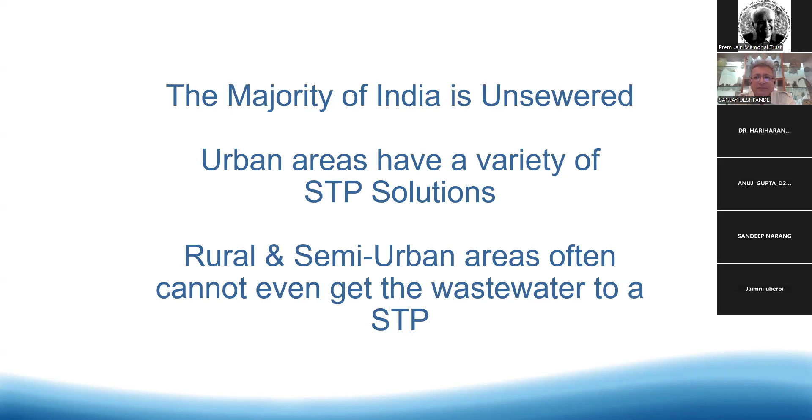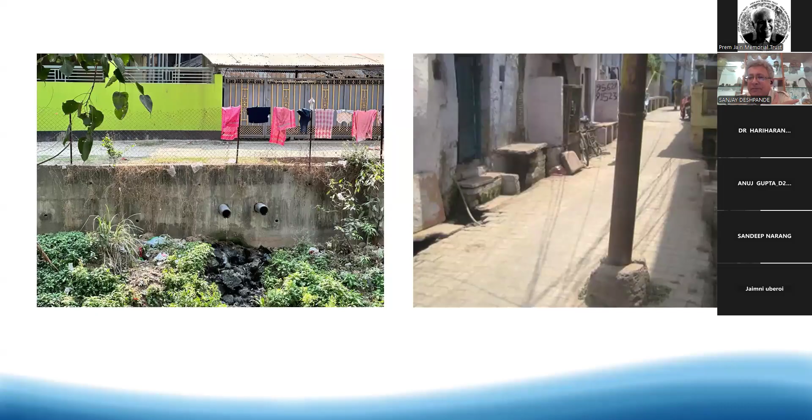Sometimes even from toilets. I've seen these repurposed and covered up to hide the fact that they're actually carrying shit from toilets along the road to the outskirts of a town. This is all over India.

The other problem you'll see that affects everything is layout. Our country is growing, it's gradually urbanizing - it doesn't mean everybody's moving to the cities, but people from villages are moving to small towns, small towns are moving to bigger towns, and so on and so forth. End result is they're all growing, and they're growing in an unplanned manner. Basically, wherever there is space, people build buildings. After that, roads come in. After that, water lines come in. After that, if it's possible, sewer lines come in.

End result is everything is basically designed to fail. And I'm going to take you through a series of examples to show you why this happens and what has happened.

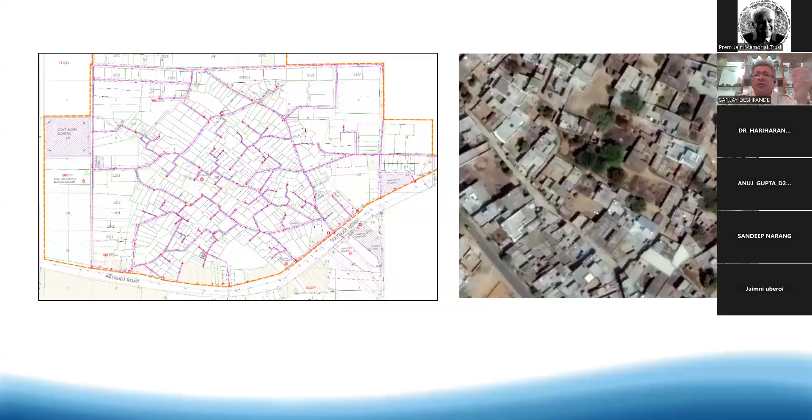Now, what are the challenges for rural or semi-urban sanitation? They're basically in three groups, and these are things each of you is going to face at one point or the other. One, these are the technical challenges. First of all, habitations have grown organically. Why does this matter? Well, sewer lines require lovely straight lines, as straight as possible. If you have roads that turn and weave, it's very difficult to put a sewer line. Every time you turn, the velocity of the sewage drops and you risk choking.

Another problem is narrow lanes. Why do I say digging can be a disaster? Well, it's very simple. If you look at the towns you live in, look at Delhi, for example - if you go around Delhi, you'll see most houses are ground plus 2, ground plus 3. When they were originally built, they were ground plus 1. When a little bit more money came, they added another floor, then another floor. And this is the typical pattern throughout India. So often buildings are not structurally sound, and if you start digging deep in narrow lanes, you risk building walls coming down. So people don't dig.

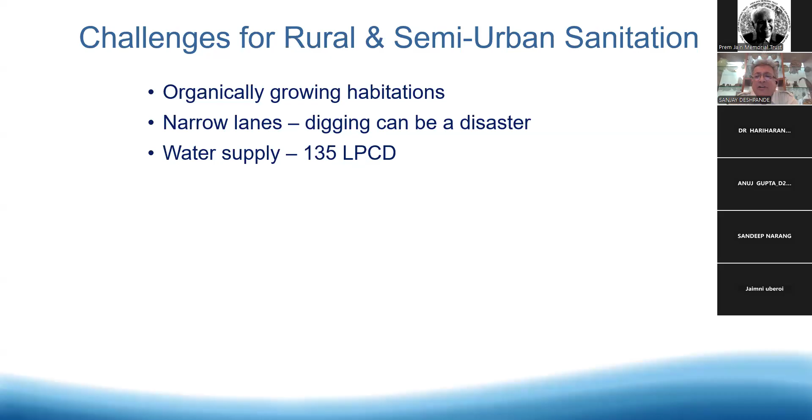The vast majority of rural and semi-urban areas, or even the outskirts of cities, get between 50 and 90 liters. Which means if you put in a sewer line, there's not going to be enough cleansing velocity, and all the solids will settle down and choke your pipe network. You will be doing a lot of work cleaning the pipes regularly, every few months. End result is putting in sewer lines becomes unviable.

People have come up with solutions. One, something you'll all run into: high-tech solutions. There's an attitude in India, especially as we're growing into a steadily wealthier country, that new is always better. The more bells and whistles you have, obviously the solution offered is better. Simple solutions don't work, green solutions are looked down on. Unfortunately, high-tech also means much higher operation and maintenance costs

and a much more likelihood of failure. When that sort of thing happens, people go to the second one: behavior change. It only failed because the public wasn't educated properly. We must teach people to behave properly so that the solution we gave them works. That attitude is probably the worst thing out there. Who are we to say that other people have to change their behavioral patterns so that a solution we imposed on them actually works? Should we not rather be designing a solution for them that works for them, that they can manage, that they can operate, that they can be proud of?

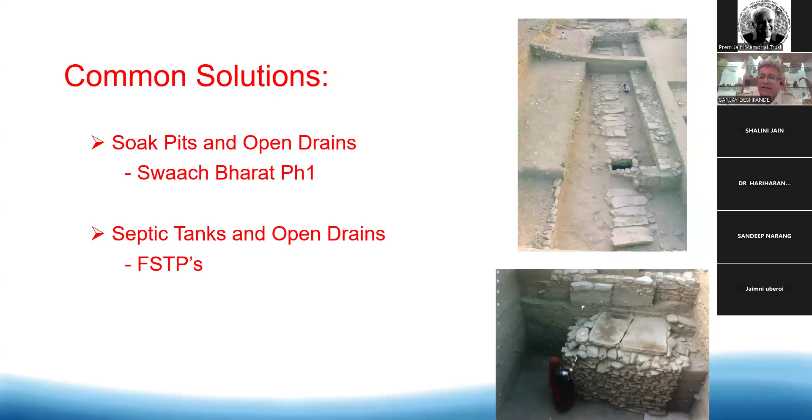So ask yourself, is there a better way? I'm going to show you a solution that we came up with. Like I said, this was designed for Canada. It's been made in India to work in India. So you can take it as it is. Hopefully some of you will agree with it.

Now, IL&FS was using this village to experiment on various sanitation technologies, using worms, using soak pits, using modified Deenbandhus. Various things were being tried out, and they were not happy with the results. And that's where they came in contact with us. And we said, we can sewer this village for you, treat all the water and recycle it for agriculture. This is something that they never thought was possible.

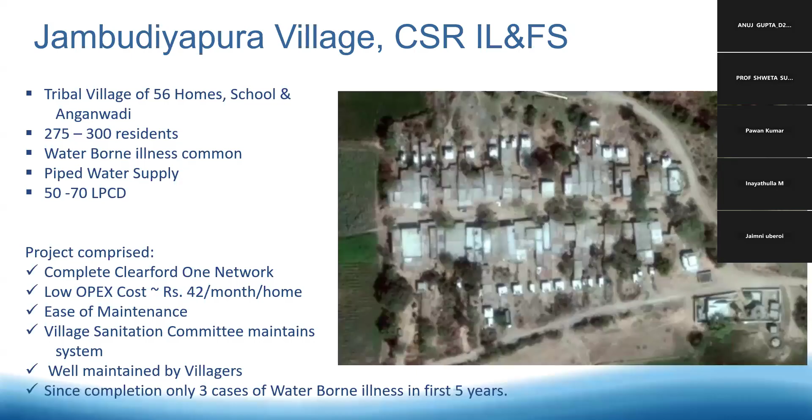Another project—this was paid for by L&T. This is a larger village, about 374 homes, 1,800 people. This is a village called Alwa, also very close to Vadodara. A similar kind of solution we put in there. Look at this—we are recycling for agricultural use approximately 36 million liters annually. What does that mean? That means if we had not put in this solution, 36 million liters of wastewater would have been going into the ground and into the village pond annually. That's what doing this stopped.

Think about the extra things, like extra agricultural income and all that. Just understand the impact you can have on the environment and on the lives of people. That's more than enough.

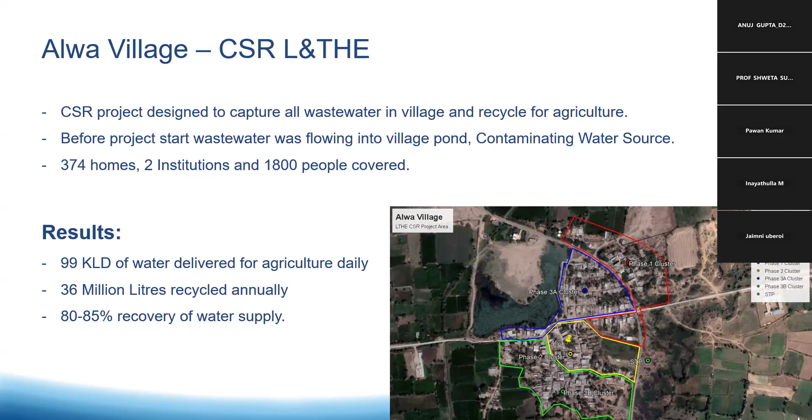Now I'm going to show you our technology. One note: it's completely green. Except for some minor electricity use, it's a completely green solution. The electricity, as I said, can be mitigated with solar panels. The solution is so green that we actually got the Solar Impulse Efficient Solution label from Switzerland for the work we've done in India. This was in 2020, at the height of COVID. We're very grateful to them for reviewing our technology and approving it at that time.

Now, the solution—this is why I say it's important to design for ground reality. What we do is we always design a solution that collects, transports, and treats all the generated gray and black waste: toilets, bathrooms, kitchens, laundry, everything. Only if you clean up everything do you stop those puddles of dirty water going down the side of the road. And only then do you reduce malaria, diarrhea, and so many other problems associated with stagnant water.

We designed a solution that's not dependent on water supply. We don't need 135, 150 liters. In India, we have installed systems as low as 35 to 40 liters and as much as 300 liters per person, the whole gamut and anywhere in between. It varies. You have to design a solution for the actual situation on the ground.

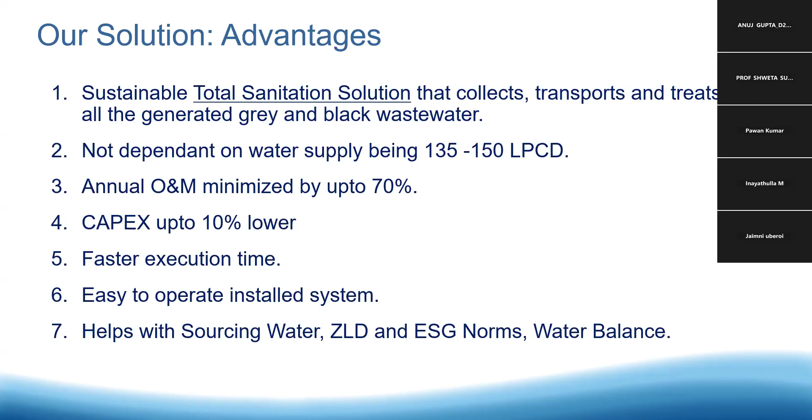More and more European companies, more and more North American companies, if they're going to be importing something from a company in India, they first ask for your ESG report, because it matters in Europe. It matters in North America. And if we are exporting to them, it's going to matter for us. So check those out.

Now, as to the technology. Remember what I said up front: there's not enough water to flush the sewer lines, to take everything to your treatment plant. So what did we do? The first thing we did was this part.

We shifted the primary treatment to source. That means to every house or every cluster of houses, we build these underground biodigesters, which we call a ClearDigest. I'll explain how they work a little later. Into that, we take everything. We digest the organic solids and we trap the inorganics. So only liquid leaves these tanks.

Now liquid will flow with gravity. It doesn't matter whether you're getting 20 liters of water supply or 1,000 liters of water supply, it will flow with gravity. So you wind up having a solid-free sewer. That's the second part of a system that carries everything to your treatment plant.

Now, the advantage of a solid-free sewer is you get rid of manholes. Have you ever asked yourself why there are manholes every 10 to 30 meters on sewer lines? If you haven't, consider this: they're only for one purpose, to allow access to clear out blockages. If you don't have solids being transported, you don't need manholes.

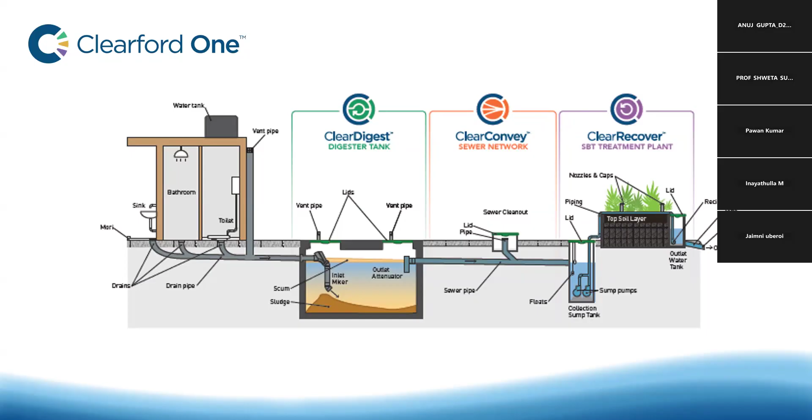In this presentation, I'm going to focus on the green solution part because that's what applies in rural India. You can't put a mechanical part in rural India. You'll never get the parts, you'll never get the engineers to operate it. Or you're going to post an engineer in the middle of nowhere, and he's going to prefer to live in the city. So it's not a viable option in rural India.

In layout, this is what it would look like. You can have these underground digesters for individual houses or for clusters of houses, larger ones for buildings. Everything goes into them. Then there's a lateral that connects it to the main sewer line that goes to your STP. So ours is not decentralized.

You'll quite often hear people say decentralized sewage treatment plant, but what they mean is smaller centralized sewage treatment plants. They don't mean true decentralized. Ours is a decentralized-centralized system. It's decentralized primary treatment in these digesters and centralized final treatment. It's a combination of both.

Now in rural India, this matters. If you think about the situation right now, with soak pits, they are the individual householder's responsibility. So the householder can decide whether he wants to use the toilet or bathroom, whether to defecate outdoors or indoors, whether only women or only men use it, whatever. It's really the householder's decision.

But once you connect everything to a sewer network and to a treatment plant, that becomes the panchayat's responsibility. And no matter where you go in India, the panchayat can enforce it. In any of our projects, you'll find the toilets and bathrooms are maintained, everything is being used, nobody's defecating outdoors, because now it's a panchayat issue.

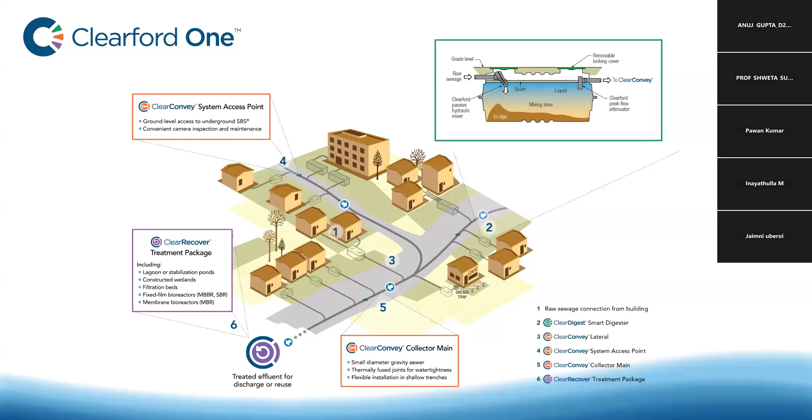Now, the components of our system. The first part is the digester.

Sanjay, yeah, 5 or... 7 minutes? Yeah, sure, no problem.

Thank you. First part is the digester. Think of it as a septic tank, but without the internal walls. A septic tank is designed to slow everything down, to cause sludge to build up, and then you empty it out frequently. What we figured out was a way to use this passive mixer, no parts, nothing, using head pressure to bring in the water and create a gentle mixing.

That allows the bacteria—we use anaerobic bacteria that's already in human waste, we don't add anything. If you add something, you don't know when it's failed, and it's a rural setup, they will not know. So we prefer to use bacteria already in human waste. It comes in contact with the fresh sewage, which is its food. It eats it, and you get very little sludge forming.

At Jambudipura, commissioned May 2016, the digester is about 1.5 meters deep. After 8-9 years now, we're averaging 10 to 15 centimeters of sludge at the bottom of these tanks. Most of that is inorganic, soil and silt, because it's a rural area. So the digestion efficiency is pretty good.

On the opposite end, we have a peak flow attenuator. That does two things: by reducing the outlet diameter, we prevent solid objects from entering the pipe network. And if you think of your own water usage, maximum usage is in the morning, less in the afternoon, goes up again a little in the evening, and at nighttime practically nothing. Conventional sewers have to handle that huge load that comes in the morning, so pipes are made much larger. By buffering it right here with a smaller outlet, we allow the water level to rise in the tank in the morning, drop in the afternoon, rise in the evening, drop at night. We shrink the pipe diameter, which makes a huge difference when excavating and laying a sewer network.

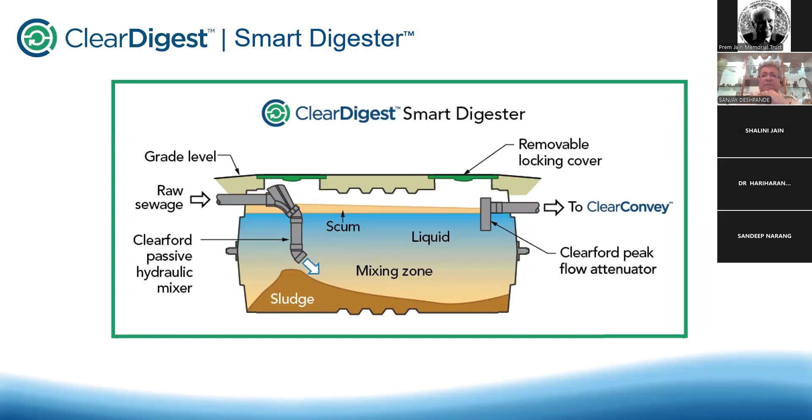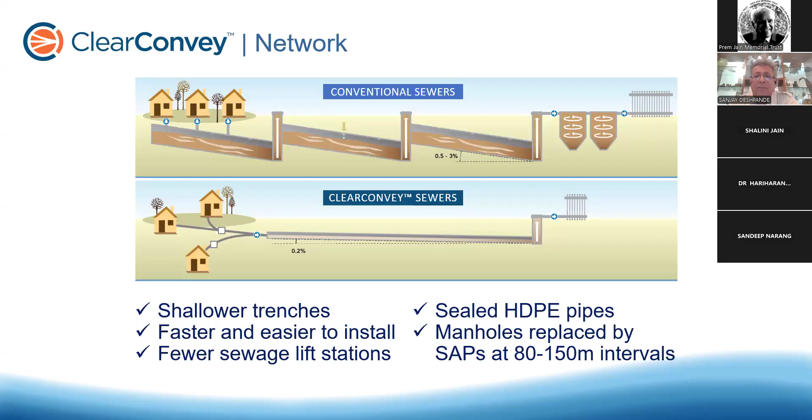Liquid will flow, like I said, with gravity, so our slope is much less. Typically for 1 kilometer of piping, our slope drops 2 meters—practically nothing. When you have a lift station at the end, all you need is a submersible pump to pick up liquid, not solids. Your operation and maintenance cost drops dramatically.

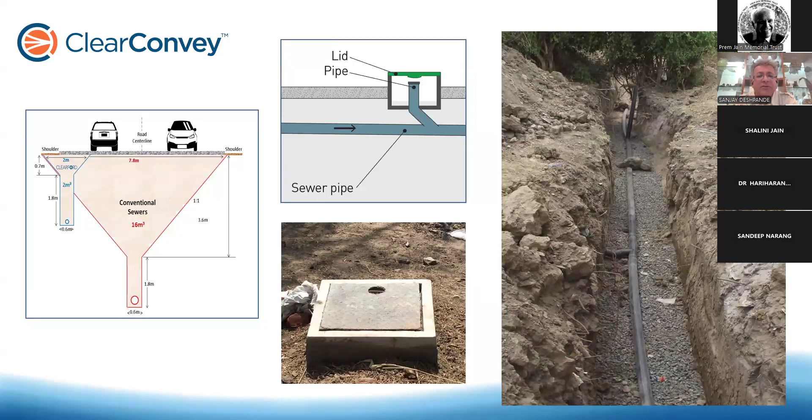Lift station, ours is just liquid at the bottom being picked up, not the slurry that you have to pick up at a conventional pump station. Reduces costs dramatically.

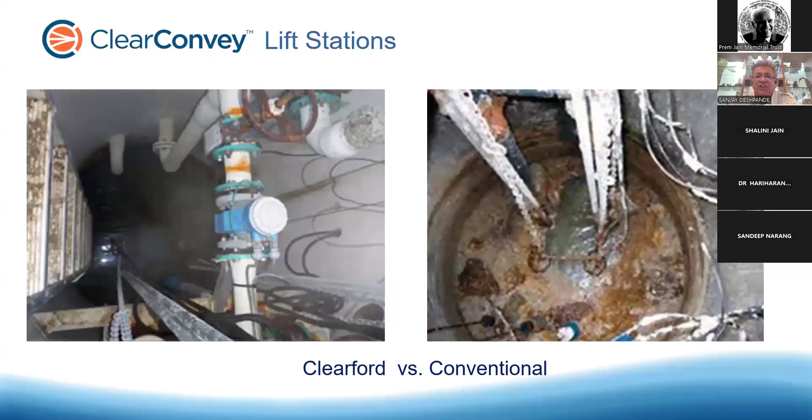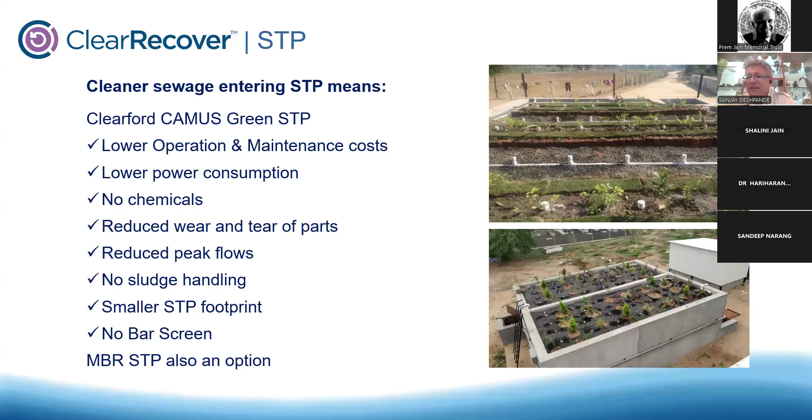This plant is also completely green, and as you can see, we meet the pretty severe pollution control board norms available in India today: TSS, COD, BOD, fecal coliforms, all work with a completely green, low pollution and maintenance solution.

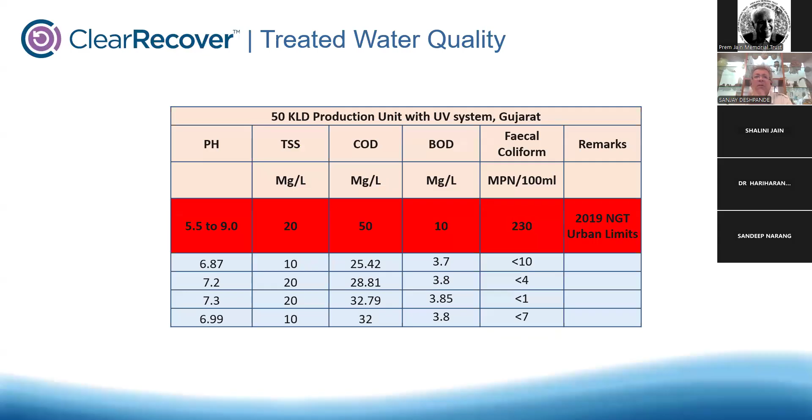It can be done. And it should be done. This is what the goal of my whole conversation today with you is.

Last bit, if you have a couple of minutes, I'll just show you a few examples. This is that plant I showed you, McCain Foods. It just showed you how solutions can be applied. These are all outside of the cities, so they all have water problems.

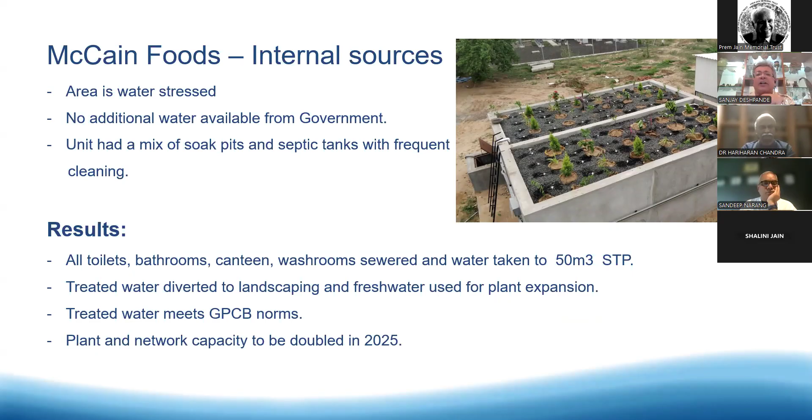Mix of soak pits and septic tanks, frequent cleaning. We put in our system, treated the water, and recycled it for landscaping. So the fresh water that was going for landscaping now is saved for other uses such as process requirements.

Water is a huge problem in the Thar Desert. How do you get water? So they actually asked us to sewer the nearby town, 2 kilometers away, capture all the water and bring it to the plant.

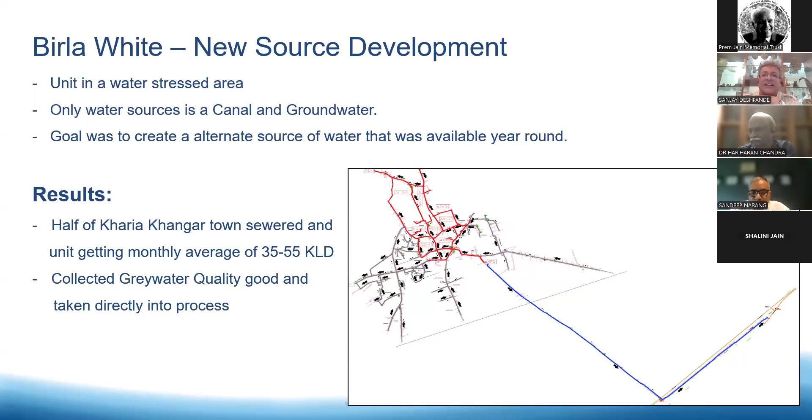There are creative ways to come up with solutions once you start thinking of green. And that's just what I wanted to emphasize. Thank you very much, everyone.

Thank you so much, Sanjay. One quick question. You talked about Alva and about 90,000 liters per day, or 90 KLD. What did it cost the village for them to do this?

That's the most expensive solution. That comes to about 70,000 rupees per house, including the treatment plant, everything. If you have it in clusters and all, such as Alva, it can come down to 50, 60,000. In comparison, a conventional sewer would start out at about 75,000 and go up to about 1 lakh. So it's cheaper, but it's not cheap. Sewer systems and treatment plants, unfortunately, cost money. It is not cheap.